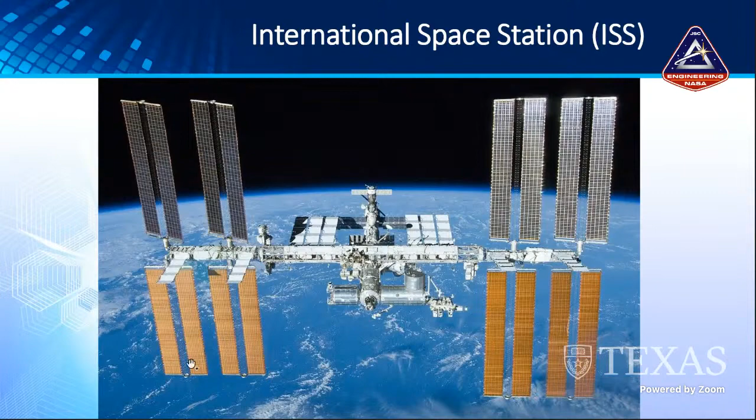Most of you probably haven't even been alive that long, and certainly I don't think any of you would remember a time when there hasn't been someone on orbit. Another way to think of that is during most or all of your lifetimes, not every human being has been on the surface of the Earth. There have been at least 2 in orbit around the Earth, and as many as 9, I think, at different times. So that's a pretty interesting thing to consider, and a lot of people forget about it.

It is the 3rd brightest object in the sky. The only 2 brighter are the moon and the sun. It's about the size of a football field, and it has a pressurized volume, a habitable volume, equivalent to about a 5-bedroom house with 2 bathrooms.

So we use it for life science experiments, physics experiments, and Earth observation. And in the last few years, we've moved more and more towards doing applied research associated with exploration, and I'll touch on some of those things as I go forward. So that's Space Station. Well, we have to supply Space Station, and we have a commercial resupply services program.

We've been flying multiple logistics resupply missions using this program ever since we retired the space shuttle. It's been 3 or 4 of these kinds of missions, plus Russian missions where they generally fly about 4 Soyuz and 4 Progresses a year. And then the other internationals, the European Space Agency and Japanese Space Agency, both fly 1 or 2 every 1 or 2 years.

But our 2 U.S. contractors, one of them is SpaceX. Everybody knows about SpaceX. They've been doing this for a long time and very successfully now. Their Cargo Dragon. One of the very cool things about Cargo Dragon is that it has a return capability. It comes back to Earth and splashes down, and we can bring science back. We can bring broken equipment back and refurbish it and fly it again.

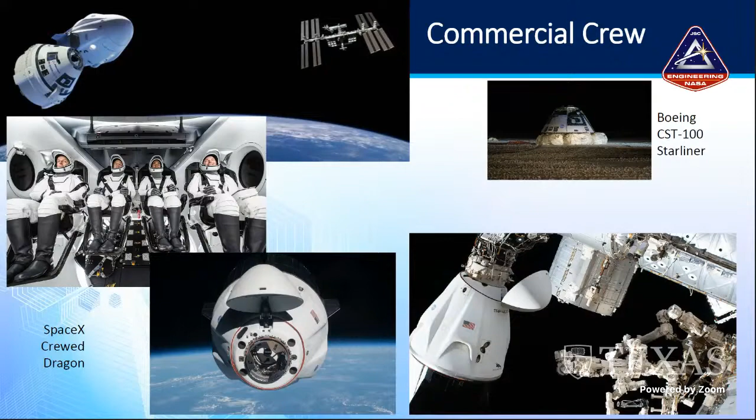So what we're trying to do is to build a sustainable space economy. We want to transition support of low Earth orbit to commercial entities, which we're doing with the commercial crew, and then ISS commercialization and other things, and then leverage those commercial entities to go onto the moon. We'll be in a position where NASA as an agency will take the big financial and technical risks, prove things can be done, and then transition this kind of work to commercial entities.

And all of that's led to the Artemis program, which has the stated goal of landing the first woman and the first person of color on the moon. Originally, this had a 2028 target date. It got accelerated by the Trump administration to 2024. I think that was an aggressive schedule to kind of sharpen our focus. Also had some political motivations.

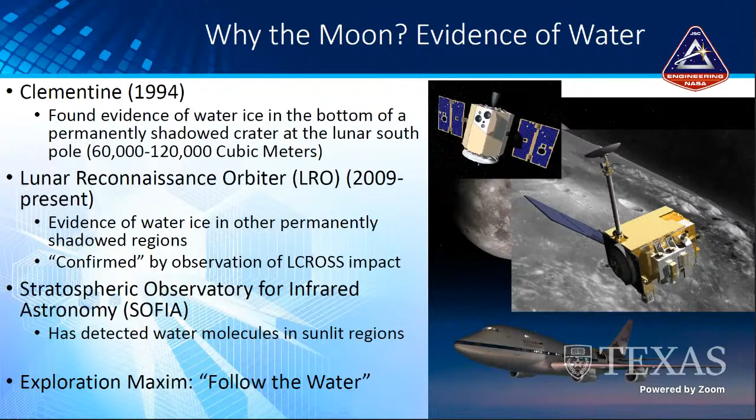So the first thing I want to talk about is the flyby missions. These are Artemis 1 and Artemis 2. But before I really talk about the mission profiles, let me talk about the key elements and systems. To do these missions, you have to have ground systems. You have to have a launch pad. You have to have a building to go assemble the rocket in and that kind of thing. So KSC has been building those up and refurbishing things they had available for Apollo for a while now, and they've done it basically.

You also have to have a communication network. For the early flights, we're going to make do with the Deep Space Network, which is not a very high bandwidth network. We're going to upgrade it some for human use. We can't use the kind of communication networks that you use on Earth because all of the satellites are pointed at Earth. So we'll use the DSN, make our upgrades, and go from there. And actually, a little later, I'll talk about some of the upgrades that we need for more permanent presence on the moon.

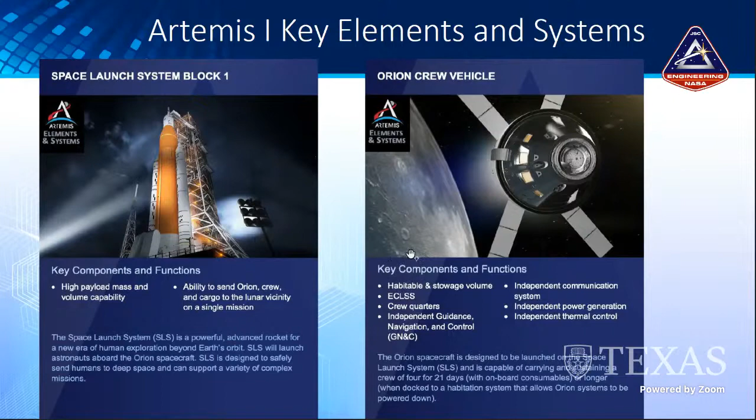And let me talk through this real quick. Starting with Orion, just from a reentry standpoint, we looked at the heat shield, we looked at how the parachutes worked, we tested all of these things out. We've done water impact testing because Orion will splash down in the ocean. Once it does splash down, we've proven that's safe, and then it has to be able to upright itself as well in case it's tipped upside down. You can't let the crew stay like that for very long.

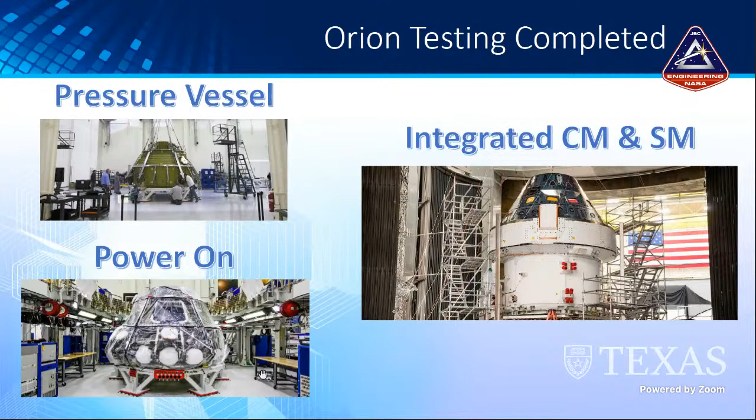You've got the same conical looking capsule and then a more or less cylindrical service module underneath it. So that's kind of the Orion testing, just pure Orion testing completed.

Talking about SLS, we started out early with wind tunnel testing. We've done engine testing. We've tested the solid rocket boosters. It's using SRBs similar to those used on shuttle, but they're a little bigger. They each have an additional segment on them, so they have considerably more power. We've also done structural testing on the core stage. We've done acoustic testing of the vehicle and the engines and acoustic mitigation testing.

We've also recently finished what we call green run testing. I won't go through the whole checklist, but it was the big ticket integrated testing for the entire SLS core stage. And it included firing all 4 engines for the entire length of a mission, so 8 minutes, to make sure the whole system would work for as long as it had to work to get the vehicle into orbit, and it worked. So then, since it worked, we started stacking the vehicle.

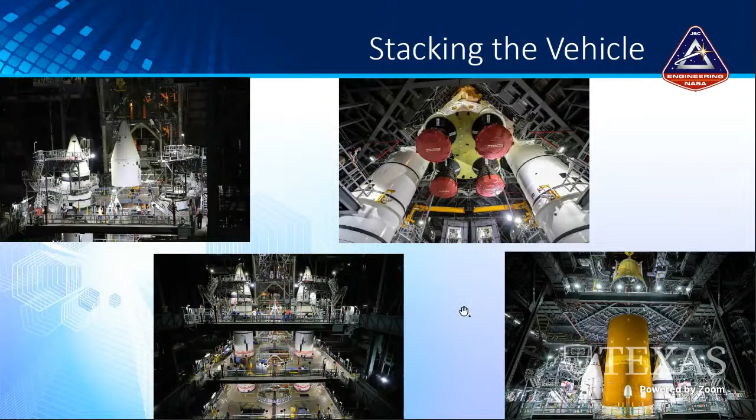And these next pictures are the entire stack. The first one is a view from the bottom up, from the base of the SLS up towards the top. The middle picture is the Orion crew module and service module. It looks different than the picture I showed earlier because it's in its shroud for launch. And it also has the launch abort system on top of it, so that the crew can escape if something goes wrong when the rocket is launched.

And then the right-hand picture is the entire stack in the VAB with all the scaffolding around it. So you have to kind of look to see everything. But it is a truly massive vehicle, and it's going to be a really awesome spectacle when it launches. So let's talk a little bit about that, the mission it's going to go on.

At that point, the upper stage, the ICPS, interim cryogenic propulsion stage, will separate from the Orion crew and service module. The ICPS actually continues on towards the moon and around it once, and then goes off into deep space. And on the way, it will release CubeSats. I think as many as 13 different CubeSats will be released, 5 of them in the lunar environment. And in the meantime, the Orion crew and service module will go into orbit around the moon. I believe it's a distant retrograde orbit.

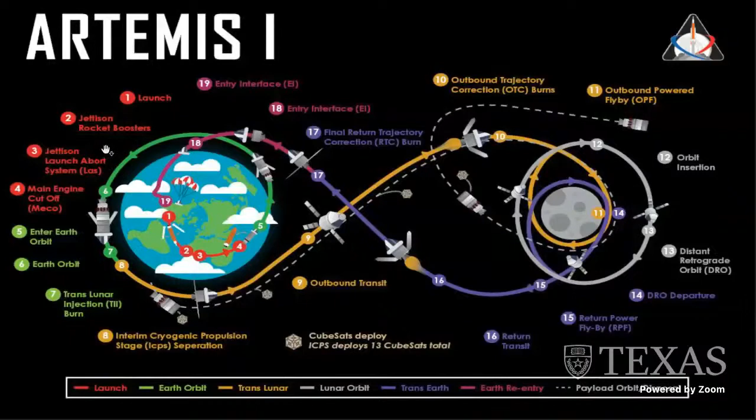It's going to reach about 5,000 degrees Fahrenheit. So it's going to be a pretty challenging thing to get through. And that's what we want to look for, is that success. And once we've proven that, we'll be ready to do Artemis II.

It's a little different a mission. First of all, of course, it has a crew. Its launch date's no earlier than about May of '24. It'll take 4 astronauts into the lunar environment. Now, the big difference on this one is when it fires its translunar injection burn, it's actually going to be done by the Orion main engine, not by the ICPS, which is kind of interesting.

But the main thing about it is it's going to fire that burn, and it's going to be in what's called a lunar free return trajectory. It will come back to Earth no matter what once it fires that burn. It's a big figure 8, and there's no intent to change that other than minor course corrections.

Once we do this, it's going to be the first time humans have left Earth orbit since Apollo 17. So that's what, 52 years roughly. It'll be a 10-day mission, 4 days out, 4 days back. Like I said, it's coming home no matter what. We just got to make sure it comes home safely. So that's kind of the first 2.

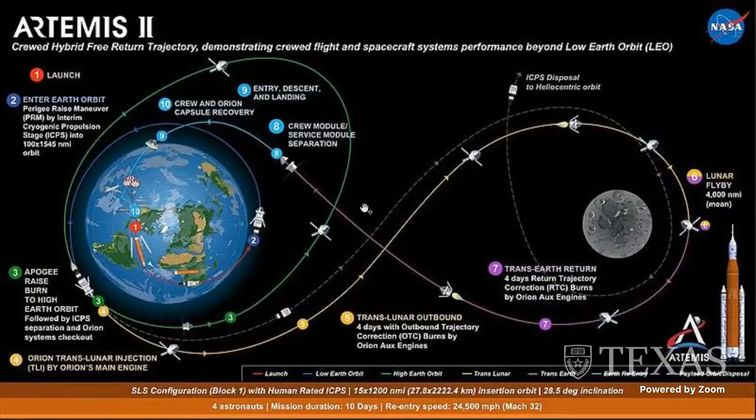And of course, we haven't landed yet here. That's for Artemis III. But in the meantime, we will be landing unmanned vehicles through the commercial lunar payload services. This is a service contract. We are paying companies to provide a landing on the moon and data and services once they get there. We're not asking them to provide the lander itself. That's theirs. We want them to get things landed. We want various scientific payloads landed on the moon.

Very quickly, looking at the key elements and systems, really it's just the landers themselves, and there are a variety of them that I'll talk to in a minute. And then also a key for us is an unmanned rover that we're going to use to search for water ice. It's called the VIPER, Volatiles Investigating Polar Exploration Rover.

The missions, this is a picture of the moon with various past missions shown on it, the USSR unmanned vehicles, US unmanned vehicles, the Surveyor, the Apollo missions, and some Chinese missions as well. And then the CLPS missions are shown kind of in the blue arrows and circles. The first of these, actually, this is probably reverse order.

The first of these is probably Intuitive Machines landing 6 payloads at Oceanus Procellarum. And then the second will be the Astrobotic missions with 11 payloads to Lacus Mortis. It's a little unclear which one's going to be there first. They're within a couple months of each other.

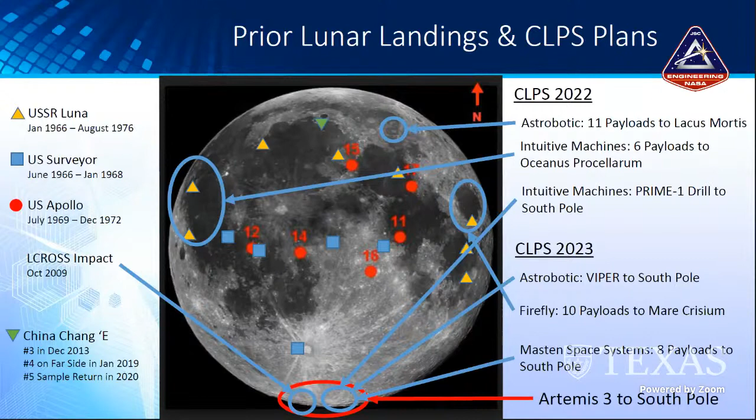Masten Space Systems is going to fly 8 payloads to the South Pole. So that's '22 and '23. There'll be a number of CLPS missions during '24 yet, but they haven't picked them. All of those will be precursors to Artemis III in 2025. So that, I think, is all I had about CLPS.

Very quickly, we'll talk Gateway. This is the space station we're going to put in lunar orbit. Let's go to the next one. These are the key elements: the power and propulsion element, and the habitation and logistics outpost, the HALO. HALO is the actual man part of it. It's the pressurized part where the crew will stay. The PPE is the motive force, if you will. Both of these will be integrated together and launched on a commercial vehicle no earlier than November of '24.

It will actually take them 9 months to get to lunar orbit because the PPE has an ion thruster, which is extremely efficient but not very powerful. So it's extremely good for us once we get into orbit. It just takes a really long time to get to that orbit. But that was the trade we made, and it'll be a good one over the long term. It'll just take a while.

The next component that's important early on is the deep space logistics module. I actually think that SpaceX is going to supply these as well. It's very similar to logistics on space station. They'll bring things up in this module, unload the module, put trash in it, and then dispose of it somehow. I don't know if these will be reflown or not. That's not something I think has been decided quite yet, and it's somewhat impacted by the HLS that you'll see in a few minutes.

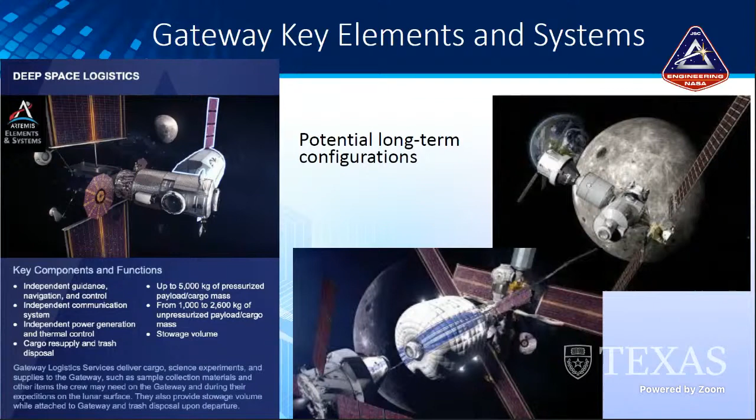And then there's the intent to build up Gateway over time, which I'll touch on in a minute, but I've shown a couple of the longer term configurations. The one in the upper right includes the European Space Agency's ESPRIT module, which just looks like a small module between the original vehicle and the Orion now. And then another one actually has an inflatable module that would give the crew a lot more room to play around in, if you will, and to live in. That's maybe a better configuration for trying out things for a Mars transit vehicle, because we'll want something big and roomy for that.

It's also highly eccentric and spends almost all its time over the southern hemisphere. I think it's a 6.5 day period. Only 3 hours of that 6.5 days are spent over the northern hemisphere of the moon. So you get a lot of good communication on the moon as a whole, but particularly in the South Pole. You can access anywhere on the surface from this orbit.

It makes a decent jumping off point to Mars. It's not the best orbit to go to Mars from, but it's a good one. It's a good orbit to go to Earth from. To go to from Earth. It's a fairly low energy access, which makes commercial resupply more viable. So it just becomes a really great orbit for general purposes. It's not necessarily optimized for any one thing, but it's good for a lot of things. It's also an orbit we've never been in before, and it's got some interesting challenges.

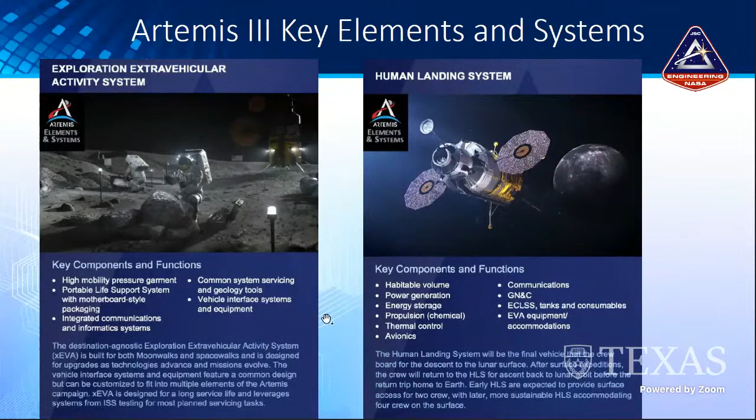We actually did the first phase of this with 3 contractors, blended government teams, each of which had a very different approach. And then we made an award to SpaceX. I think most of y'all are aware of this, using what they're referring to as their SpaceX Starship HLS. They are going to have a line of starships, I believe, for different purposes, but this is the Starship HLS. We awarded this a few months back. There are some legal challenges, and they've only recently cleared, and we've been able to start discussions with them.

So since it's been so recently, there's still a lot of unknowns about the Artemis III missions. I was hesitant to include any sort of mission profiles similar to what I had for Artemis 1 and 2 because I'm sure it's not accurate. For instance, it includes a rendezvous at Gateway that won't happen. And also, frankly, Starship is a radically different design than what we expected, so we're kind of adjusting our thinking in terms of the mission concept. A couple of things I think I can say about it.

First of all, there will almost certainly be an unmanned lunar landing before Artemis III. The Starship will touch down unmanned and they'll test it out and all that. When Artemis III comes along, it will launch unmanned and be refueled and checked out in low Earth orbit. Once we know everything's good, we'll launch a crew on Orion. Orion and the Starship will rendezvous somewhere. Might be in low Earth orbit, more likely to be in a lunar orbit. I'm not sure which one.

They'll transfer the crew, either 2 or 4 of them, from Orion to Starship. They'll take Starship down to the surface, do their thing down there, then ride Starship back up to Orion and use it to return to Earth. The Starship itself, the first one, I'm not sure what they'll do with it. They may bring it back to low Earth orbit and refuel it. They could even bring it back to Earth itself. That's kind of up to SpaceX at this point, and we're not sure enough of what their plans are yet.

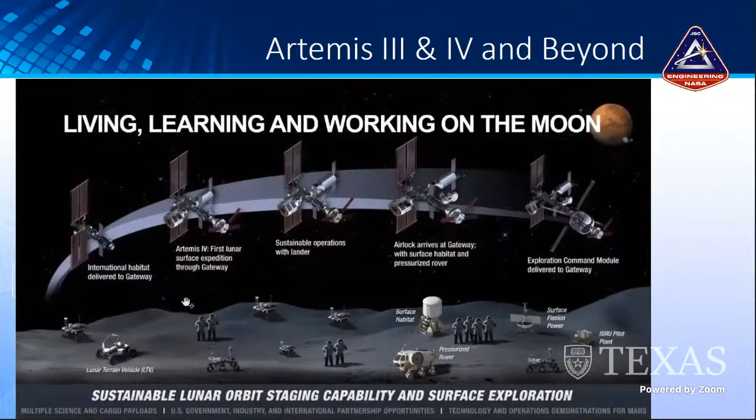Then after Artemis III, we'll start expanding Gateway, expanding the lunar base, et cetera, and go for much longer missions and start to use those to learn how to go on to Mars. And as we do this, we'll get greater engagement from our commercial partners and also our international partners. They will be supplying various components of the base camp and other exploration capabilities.

So this is a little bit of what the base camp might look like. I won't talk through it on this picture, but very quickly, the kinds of components I mentioned already, we've got to upgrade the communication systems in order to give them enough bandwidth for humans to use. What the deep space network is today is somewhat equivalent to a dial-up modem. We need something much more equivalent to high-speed internet. We also need a network on the lunar surface.

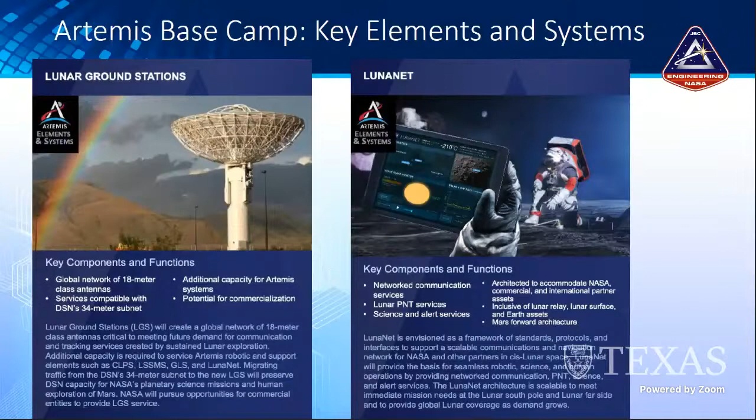We kind of started calling this LunaNet. I'm not sure if that'll stick, but the best way to think of it is something akin to a 4G or 5G cell phone capability.

Just as important as how we generate power is how we transmit it. Running cables from a set of solar panels or a nuclear generator all the way to a habitat takes a lot of mass to bring cables up there, and we don't want to spend that much mass, so we're going to have to find better ways to do it.

We've got other technologies we've got to develop as well, high-performance spaceflight computing for a lot of reasons, but one thing of particular interest is that it enables precision landing. We need to be able to put landers close to the permanent base and let them take off again without having to worry that we might actually hit the base, right? So we've got to have something very reliable there.

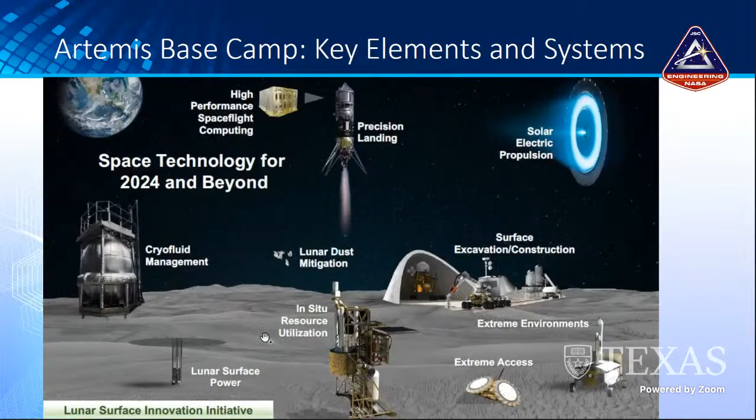We've got to have lunar dust mitigation stuff in place, ISRU. If we're going to refuel the landers from, say, the H2 and O2 from water ice, we'll need some cryofluid management capabilities and various other things on the surface.

Mobility is extremely important because we're talking about a really big area. The crater in the middle here is Shackleton Crater. I've overlaid on top of this an outline of Washington, D.C. in orange, and then the beltway around Washington, D.C. in red, just to give you a feel for how big it is. You're not going to be able to do this on foot. You have to have the ability to transit on a vehicle.

You have to have the ability to stay in that vehicle because you can't just always keep coming back to a single fixed point. And of course, you'll have to bring power along with you and all kinds of things. So we're very much working towards that kind of architecture to enable exploration and ultimately to go beyond Shackleton Crater too.

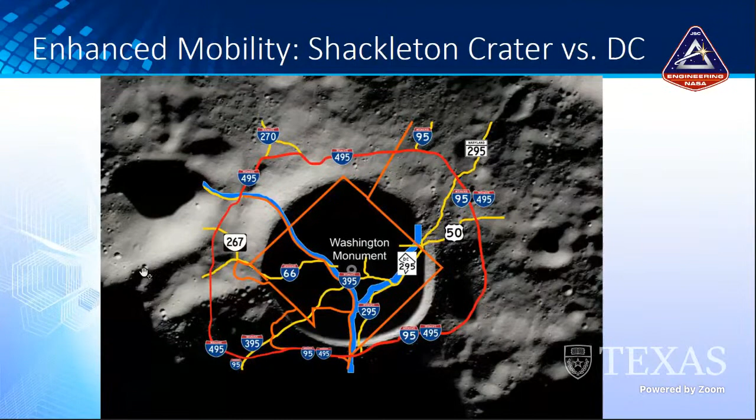For humans, they face isolation and confinement issues, which can create some behavioral problems. It's hard to deal with that kind of thing. Distance from Earth is a problem too, both from a mental perspective, but also from a comm delay perspective. You can't talk to anybody easily once you get past the moon a ways. The moon's only about 3 seconds round trip, a second and a half one way. But once you get to Mars, you're talking 15, 20 minutes one way kind of delays. So you've got to have ways to deal with that.

Gravity is an issue. We actually at this point know more about how humans perform in 0G than we know how they perform in 1/3 or 1/6 G.

So we've got to figure out how to deal with those different G fields. And then changes in gravity are a big deal. It takes a while to get acclimated when you go from 1G to 0G to 1/6 G. Or more importantly, going to Mars and being at 0G for 9 months and then going to 1/3 G. You have to deal with physical weakness, you have balance issues, your reflexes are different, all kinds of things are at issue, and we've got to work on how to deal with that.

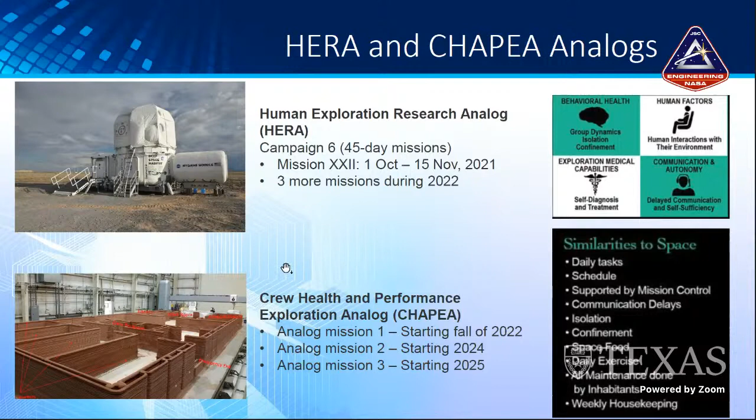In addition, there's going to be lots of interesting stuff happening on ISS. There'll be a number of crew rotation missions and resupply missions. There'll be the private astronaut missions, maybe even Dream Chaser. There'll be EVAs. All of that stuff will be happening in low Earth orbit, and I can't even begin to list all of it. So that's kind of the short term. Longer term, or of great interest here, is the Artemis Accords.

So we're going to lead these Artemis missions. International partnerships are a big deal, a key role in achieving a sustainable and robust presence on the moon. We can't do it all by ourselves as the US, and we particularly can't do that and then go on with a human mission to Mars. So we're trying to negotiate a common set of principles to govern the civilian exploration and use of outer space. That's what the Artemis Accords are all about.

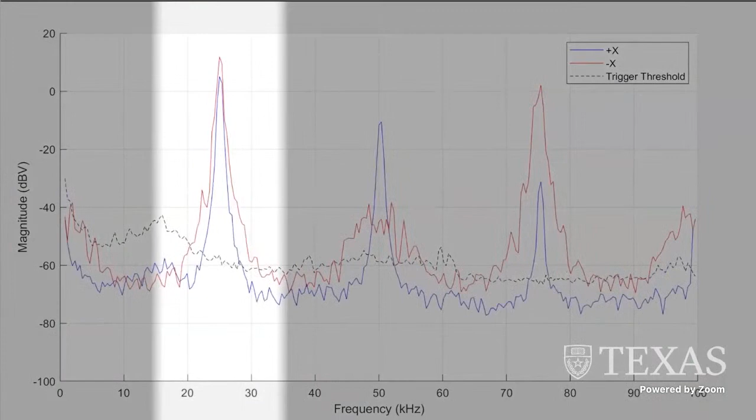This product is important because it can serve as early automated leak detection for pressurized vessels such as spacecraft, airplanes, and industrial equipment. Email now for more information.

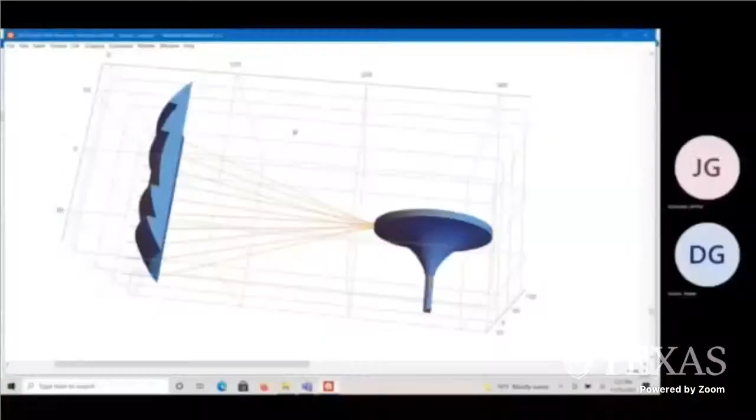Team Hyperion is spearheading the effort to design, simulate, and develop the methods needed to produce a lunar solar concentrator that will give explorers near continuous access to energy on the lunar south pole. This undertaking requires the team to synchronize functions between a variety of tools, including CAD software such as Autodesk Inventor, Optica EM for ray trace simulations, and SimScale, along with MATLAB for thermal analysis. Success here on Earth will power our journey into the unknown.

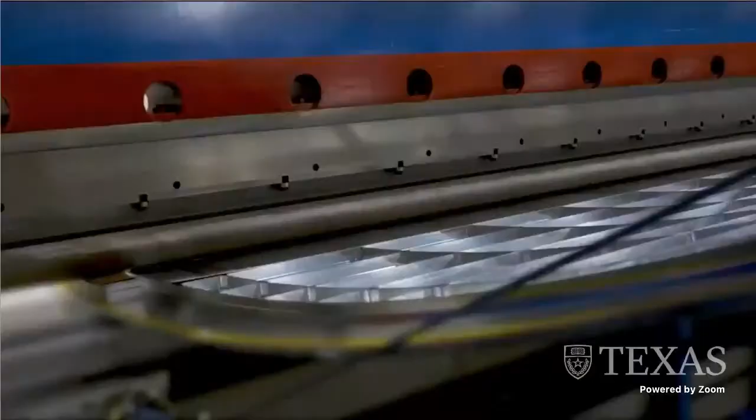Moving on to the next section, we will have a simple Ethernet switch which will connect to our 4 ICs. Then, through a series of common connectors, we will connect to our data collection. These could be anything: a habitat controller, various thrusters, alarms, you name it. This is a brief overview of what Team Vulcan has been working on these past few months.

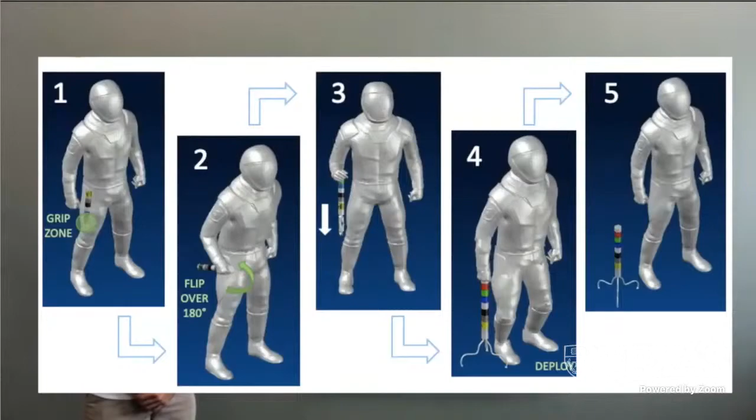Team Callisto intends to provide an improved solution for any mission, whether it be on the moon or any future destination. We are NASA Space Grant.

Hello, my name is Ali Hamoud and I'm the team leader for Team Untitled. We are working on the Advanced Spacecraft Lighting Control System. In space, crew members will not be able to maintain their circadian rhythms, so we are creating a method to help them maintain that. Hi, my name is Alejandro Bacallo and I'm the reporter as well as the hardware lead for this project. My name is Nicholas Tyndall. I am the software lead for this project.

In order to help with the circadian rhythm problem, we are going to be using an artificial lighting system to help align circadian rhythms both in humans and plants with that which we expect. We also hope to add a voice control system as a secondary goal. Our plan is to use a network of Raspberry Pis to control a DMX lighting system, as well as read from sensors to see the actual values being outputted by those systems. Those values will be used with a GUI interface running on a Raspberry Pi as well to control and implement our system. We are NASA Space Grant.

Human exploration has thrived throughout history. NASA is currently the forerunner when it comes to space exploration. Research has led to believe that there is ice water present in the south pole of the moon. The problem at hand is radiation coming from cosmic and solar rays. Our plan is to find a way to design a material that would act as a black body. Our team used the application of surface roughness and geometry to achieve a more black object, to model an ideal black body using the properties of absorption and emission.

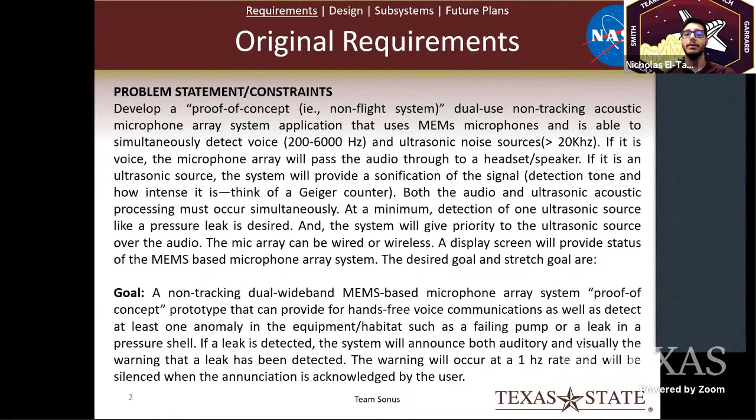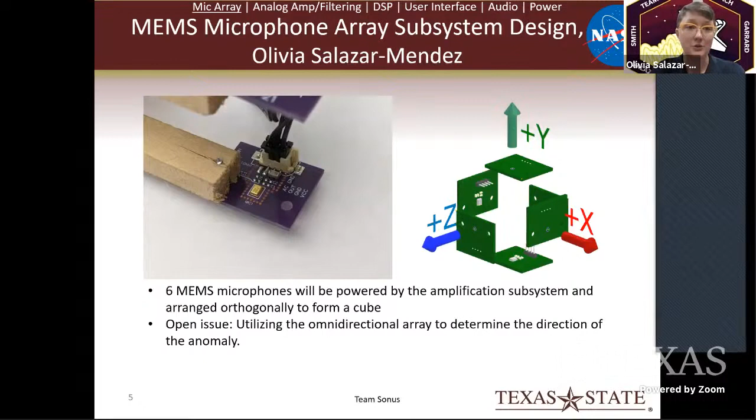I'm in charge of the analog amplification and filtering subsystem. This subsystem takes 5 volts DC from the power subsystem and feeds that through a linear regulator, which outputs 3.3 volts to each of the MEMS microphones, as well as to each stage in the analog chain. The subsystem takes in the signal from the MEMS microphone and passes them through a high-pass filter, an amplifier, and a low-pass filter, which help attenuate noise and condition the signal for processing by the DSP subsystem.

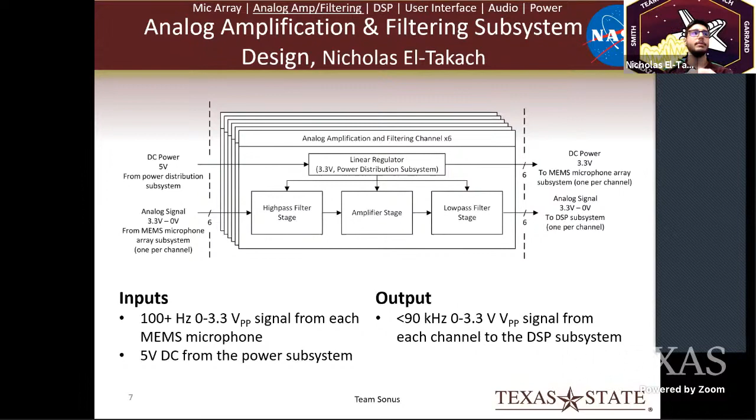I'm Mason Huebner, and I manage the digital signal processing subsystem. Inputs include function calls from user interface for output audio controls and the analog signals from the analog conditioning subsystem. The ADC digitizes these signals, allowing some DSP functions to be performed. These include digital filters and downsampling to isolate voice audio data from one or more channels, and fast Fourier transform to calculate the spectrum data for all channels. This spectrum data is used for noise floor sampling, anomaly detection, localization, and sonification.

Detection is based off the current signal magnitudes and the sampled noise floor. Localization compares magnitudes between microphones to determine a likely point of origin. Alarm synthesis is simply an alert tone, and anomaly sonification allows user to hear the anomaly. The output audio is mixed and sent to the output audio subsystem, while the detection localization data is made available to the user interface.

This is an example of proof of concept showing data from 2 microphones spaced 180 degrees apart. The trigger threshold is determined by sampling the noise floor at startup and applying an offset, while the localization is determined by comparing the magnitudes between the 2 microphones.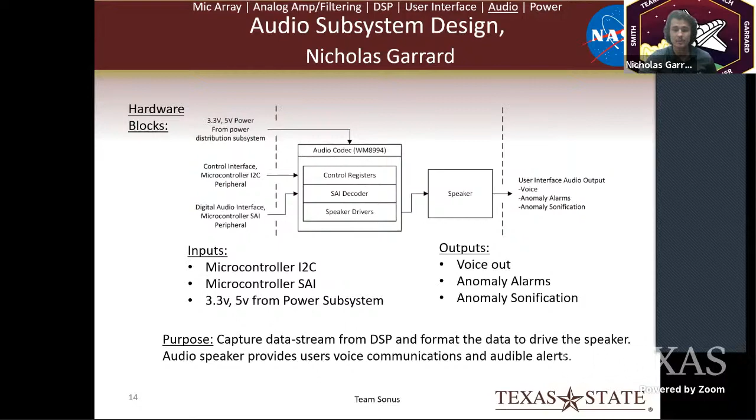Hello again. This is the audio subsystem. This subsystem is comprised of two parts, one being software and the other being hardware. Initially, the software receives a 16-bit 12 kilohertz sample data stream from the DSP subsystem. Via I2C and the serial audio interface, this initializes the audio codec. In hardware, the audio codec decodes the data to drive a local speaker. The local speaker provides voice, anomaly alarms, and the anomaly sonification that was previously mentioned.

These are some of the design risks and design considerations that we've had in mind while designing our system. Now, some of these risks include delays due to the ongoing COVID-19 pandemic, delays due to the ongoing part shortages, any delays due to learning curves for any subsystem implementation, any undiscovered design flaws that we encountered during implementation, which we have allotted time for, and delays due to acts of God.

We could have another Texas Snowpocalypse, which would be terrible, but then my snowman would get a friend.

We also have some design considerations that we'll be thinking of as we continue to build this project. One of them being redundancy wherever possible, so that any small parts failures won't bring down our entire system. We also are considering size, weight, power draw, and heat generation, which is especially important for the use of this product in space and air travel. We also are considering a universal user interface by using simple symbols such as the vector described earlier to make it a little bit easier for people if everybody on the space station is using a different language. And then finally, we have our stretch goal, which is the anomaly localization.

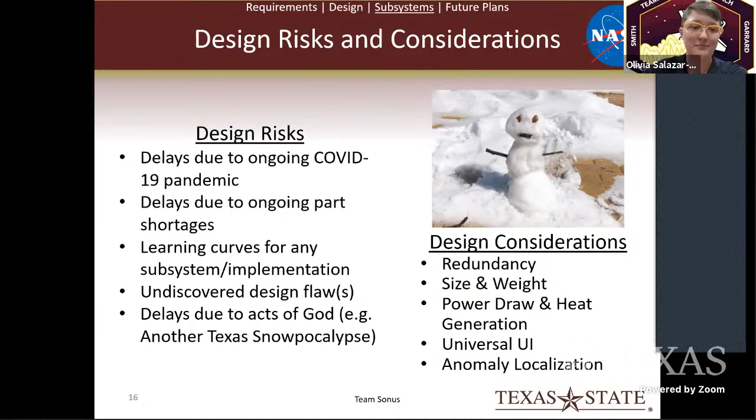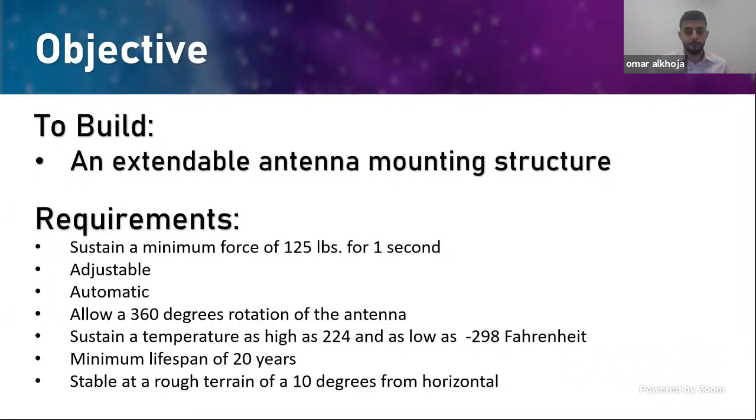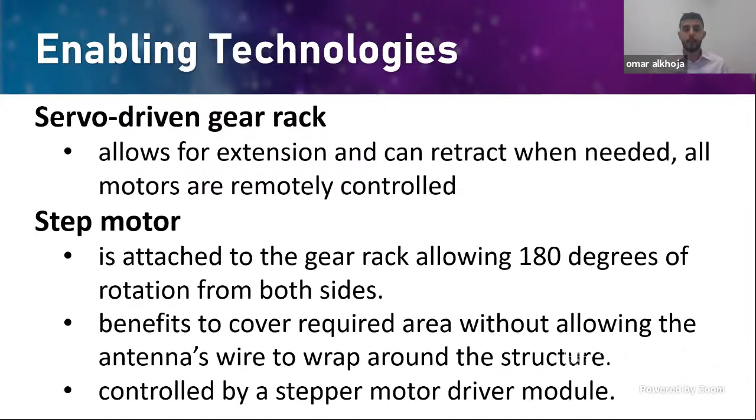In terms of enabling technology, we have a servo-driven gear rack that allows for extension and can retract when needed. All motors are remotely controlled, and there's a step motor attached to the gear rack, allowing 180 degrees of rotation from both sides. This is very beneficial because it would prevent the wire from wrapping around the structure. And the last thing would be the step motor is controlled by a stepper motor driver module. And that will be it for me. Now Ismail will go ahead and introduce the design.

Next slide. So our proposed concept consists of a metal box structure with a gear rack that is driven by a servo motor, as you can see. The gear rack can extend up to 3.5 meters, making the total reach of the antenna panel approximately 7.5 meters including the height of the Nova C lander. A step motor will be attached to the top of the gear rack, which will allow the antenna panel to rotate around its axis to cover all the surrounding area.

The rotation will be done in 3 stages. The first stage is a clockwise rotation of 180 degrees. The second stage is returning to the initial position. And the third and final stage is a counterclockwise rotation of 180 degrees. Then the process will repeat. This is done to ensure that the wire attached to the antenna does not wrap around the structure and break.

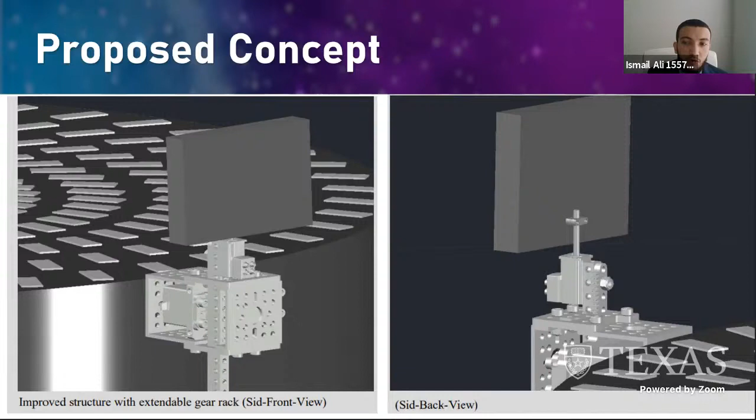The antenna will be fixed to a rotating cylinder coming from the step motor with a cylindrical bracket holder that can be adjusted to fit the size of the rotating cylinder. Also, different types of bracket mounts are considered. Our simulation, next slide. Our simulation was done on the gear rack to ensure no large deformation or fracture occurs. The gear rack was fixed from its teeth as well as the back sides.

The finite element analysis as well as the thermal analysis simulation were performed including two constraints: radiational heat of about 106 degrees Celsius applied to the whole body, which is the average temperature reached during the daytime on the moon. Also, 125 pounds of weight applied on the top side of the structure, and 3.75 pounds of weight applied to the front top side, which represent the force applied by the space crew needing to grasp or kick off the antenna structure, and the weight force applied due to gravity by the antenna panel, respectively.

The weight force was applied assuming Earth's gravity, which is about 6 times larger than the moon's gravity. However, this assumption shows that our device can actually carry more than the simulated weight on the moon. The maximum deformation recorded was less than 2 millimeters, which shows that the structure will not break or develop plastic deformation for the specific type of aluminum alloy that is used as a material.

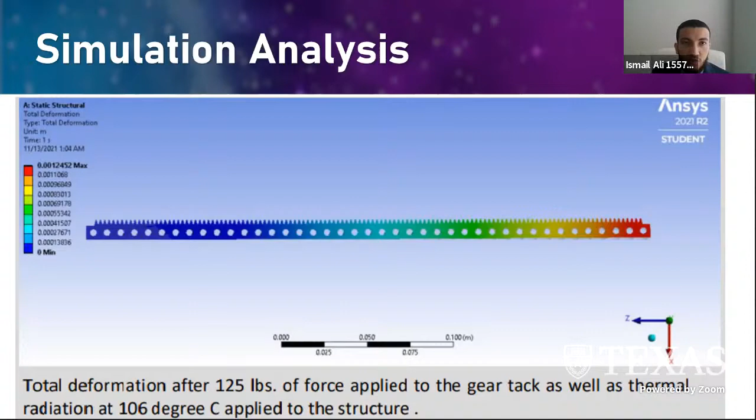As we develop the design further, we will perform more simulation to meet the changes in the device. Once our team develops a prototype, we can run more tests to validate our device. And now Yusuf will be speaking about the material selection.

Thank you. My name is Yusuf, and I'd like to first point to the antenna that we're going to be using for our device. So the antenna required for our mounting structure is a high gain type, which means it can amplify weak signals used in satellite communication. And the panels with the antenna are going to be about 476 millimeters long and have a minimum weight of 1,750 grams. And it'll allow an antenna signal of 15 dBi.

So the frequency of this antenna is expected to be about 1800 megahertz. Higher frequencies result in wider bandwidth, and that results in higher data rates. And this will be important for facilitating the BTS, the base transceiver station, which is going to be used for LTE wireless communication. So on the left side, we're going to talk about the material selection.

So in terms of material selection, we were concerned about the device becoming brittle under the moon's colder temperatures, which can be as low as negative 173 degrees Celsius. And for the mounting device, we found aluminum alloy T6 grade to be a suitable primary material. It's a material that's commonly used in heavy duty structures such as aircraft wings, helicopter rotors, and shipbuilding structures.

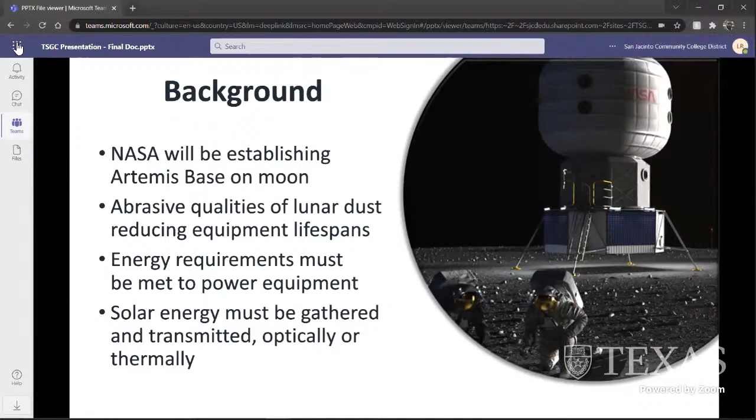All right, good afternoon, everyone. We are Team Hyperion, comprised of Daniel Guerra, Luis Ana Padron, Jeff Gleesman, Luis Rosario, and myself, Jordan Seibert. Today, we will be presenting the novel non-tracking fiber optic solar concentrator for extraterrestrial applications.

NASA will be establishing the Artemis base at the south pole of the moon, and assessing the obstacles encountered during the Apollo missions, it is crucial to consider the abrasive qualities of lunar dust that can drastically reduce equipment lifespans, design a durable source of power collection that is capable of meeting the needs for longer explorations, and opt for materials that will optimize solar energy collection through optical and thermal means.

This year, two teams are working in collaboration on this project. Team Hyperion, comprised of San Jacinto and UT Tyler students, will be working on designing the lens, and will also be in charge of optical simulations and thermal simulations. The second team, Team Solace, also from UT Tyler, will be focused on lens and collector fabrication, designing a testing bench, and testing for thermal concentration. Both teams working together on this prototype will then produce data that can be used to validate San Jacinto's optical and thermal simulations. Next slide, please.

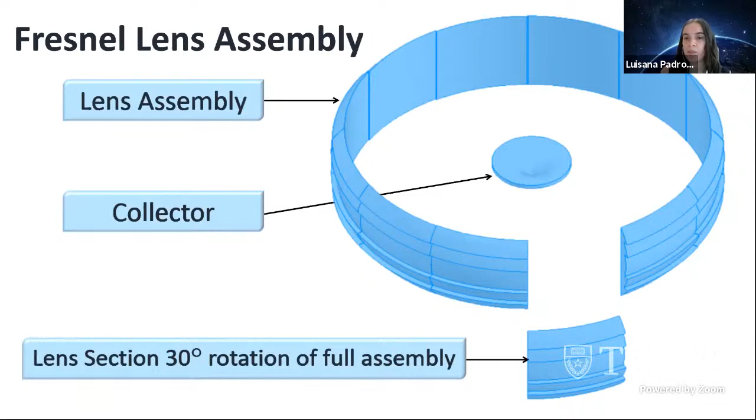Jeff, you're muted, sir. Jeffrey.

Next slide. Daniel, you're muted.

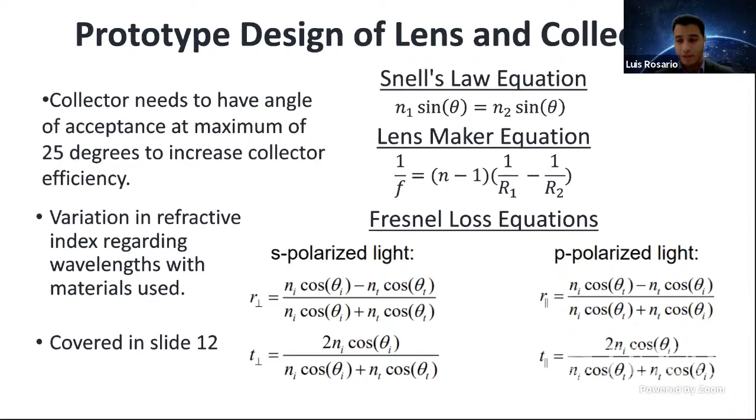To mitigate the damaging effects of lunar dust, it was decided to apply silicon dioxide to a polycarbonate and PMMA lens. With the addition of a coating, it was important to consider the changes to the overall refractive index of the combined materials. Altering the refractive index means the focal point will shift closer to the lens. However, this shift will not be significant due to how thin the coating is expected to be.

After designing the lens, the design team transferred the STL file to San Jacinto's thermal and optical simulation branch to be simulated on Optica EM software with the appropriate refractive index that was assigned for the material. On the south pole of the moon, solar rays are near parallel to the surface. With that in mind, the team selected simulation parameters consisting of a 10 parallel ray configuration, similar to the expected angle of solar irradiance.

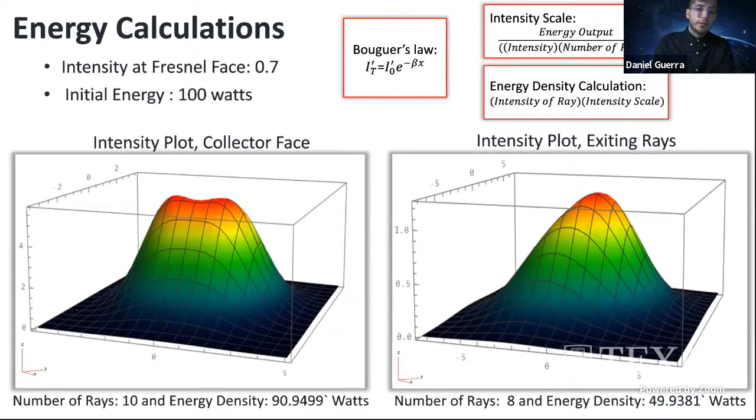In addition to a steady state heat transfer analysis, thermal simulations were created in both SimScale and MATLAB to investigate the heat transfer of the system and attempt to predict the behaviors of each material selected. In SimScale, the heat transfer simulation solves for the temperature distribution and heat flux in solids under thermal loads. In implementing equations such as Fourier's law and Newton's law of cooling, the coefficients of each material can be found and input into the required slots in the system.

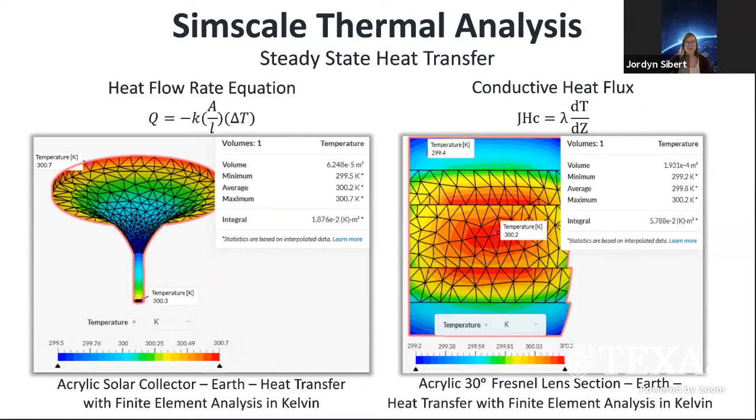After all accurate and desired coefficients, SimScale will calculate the heat transfer outputs as demonstrated on the slide, which presents us a deeper analysis that allows for inspection point tools and a summary of your minimum, maximum, and average temperatures. Parallel simulations were also run in MATLAB to ensure the outputs in SimScale were consistent.

In deciding which system is providing the most accurate outputs, comparison with data collected from the materials branch, Team Solus, needs to be done and has been added to our forward work next semester.

For power generation, the team will implement the use of a black box that isolates the system from ambient light. Within the capsule, there are multiple solar panels that are wired in series to produce up to 32.5 volts at 2 milliamps. To transport the collected optical energy, a side glow fiber optic cable was coiled and placed in the capsule. The use of the side glow fiber optic cable allows for the collected light to shine evenly along the surface of the cable, allowing for the embedded solar panels to use that light and turn it into usable energy.

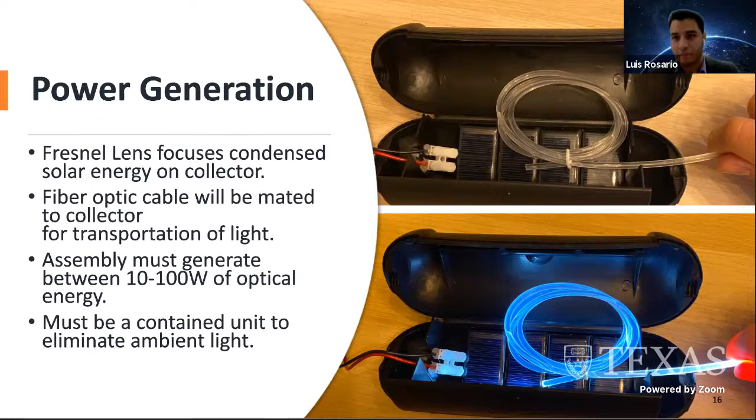In fabricating multiple testable prototypes, it is expected to validate the simulations run on Optica EM for this Fresnel lens-based novel tracking system. Once the simulations have been validated, projects can be upscaled for future lunar missions. It is imperative to consider having a modular and compact design that allows for the improvement or replacement of parts while maintaining its integrity in the hostile environment of the moon. Additionally, with the abrasive qualities of lunar dust, a system had to be designed that would eliminate the need for moving parts. Next slide, please.

And this is for our future work. We will be fabricating the lenses and a test bench. Team Solus will be using that test bench for optical and thermal concentration. We will also finish developing the power capsule to generate between 10 watts to 100 watts as usable energy. We'll also be doing finite element analysis for the lens transportation, and we'll also be testing the lens for efficiency and power generation.

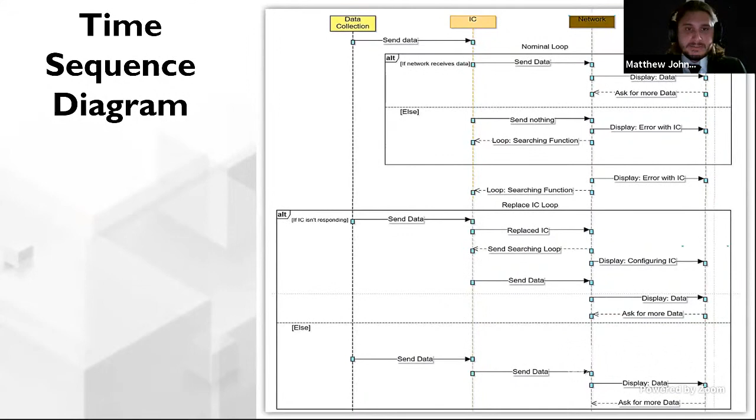What's not represented here, but will be implemented in the future, are status indication lights. That way we can at a glance determine whether or not our controllers are imaged properly and if they are on the network or not.

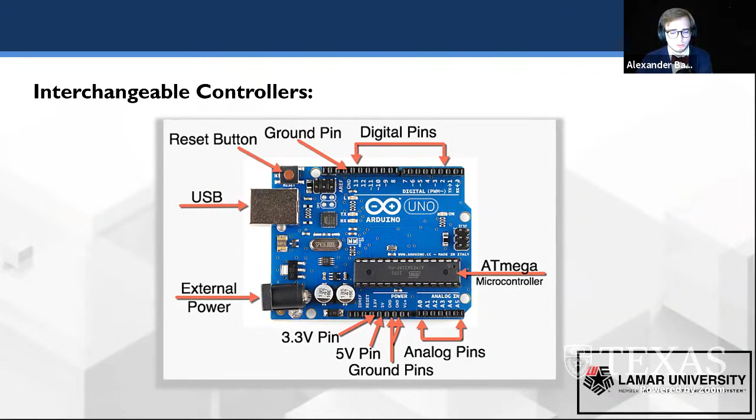Arduino Unos are inexpensive, open source in software and hardware, don't require any external programmer, and the IDE software that comes with it can operate on any operating system, which includes Windows, Linux, and Mac OS. The Arduino Uno features several pins, such as voltage outputs, ground pins, analog pins, and digital pins. There's also a physical reset button to restart the controller in cases where a quick fix is needed. Arduino Unos have both USB and external power ports as power sources. The USB connection allows the user to upload code to the board from a computer, but also run and loop independently, which is vital for our setup.

As previously stated, Arduino IDE is open source software, giving us an abundance of libraries and the ability to ping a server. The language that's being used is called Processing, which is very similar to C code. Having experience in C++, we had some areas in which we had to learn. We tested some controller receiver code that we wrote with a temperature sensor on a breadboard and received positive feedback, which leads to my last point.

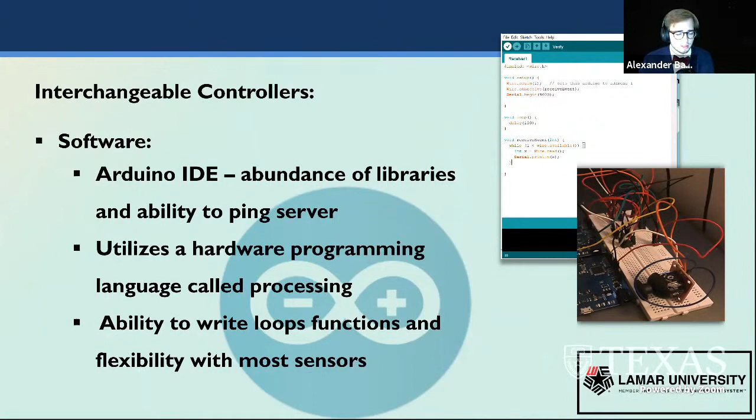IDE has the benefit of having the flexibility with most sensors. Now, this next section is going to be wiring schemes presented by Bradley Gray.

Hello, my name is Bradley Gray, and I'm going to be talking about what is going into our decision-making process with the wiring scheme between the IC and data collection. Our first look at wiring starts with the OSI model, mainly the physical and data link layers. The wiring scheme will require both digital and analog signals per the constraints of the project.

And when choosing a wiring scheme, we first consider distance, how far away the data collection can be from the IC; usability, how easy the wiring will be to learn and implement; wire amount, 2-wire, 4-wire, or dependent on the amount of sensors; and interchangeability, how easy it would be to create modularity with different sensors and simulators.

Moving on to section 7, the future of the project, presented by Jordan Lake. Moving into our next semester, we'll begin integrating the systems we've designed this semester using our functional block diagram and begin the simulation of these sensors and testing of the system to ensure it meets all of the requirements stated by our prompt. Construction of the physical hardware and enclosure will follow this, proving that these simulations operate correctly.

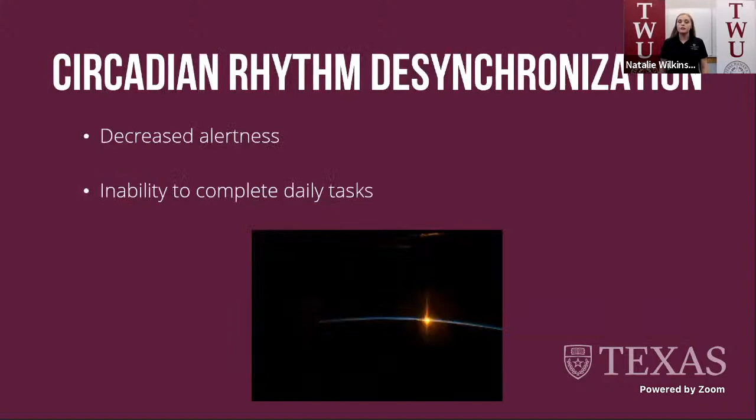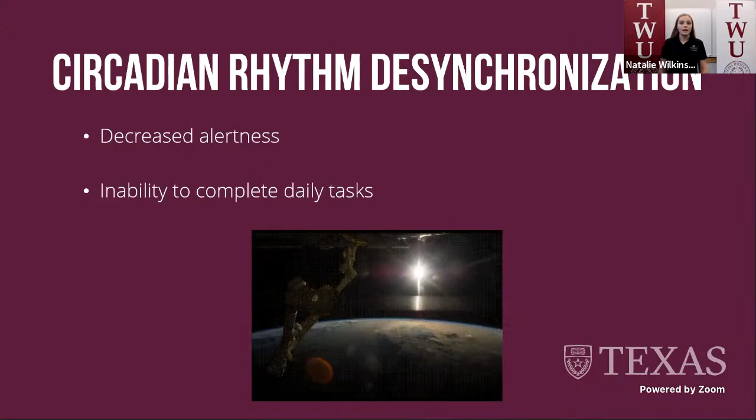The circadian rhythm is an internal process of the brain that regulates the sleep-wake cycle. Outside environmental factors can affect the circadian rhythm, such as lightness and darkness. In microgravity, astronauts witness the sun rise and set about 16 times per day. As a result, a disruption or desynchronization of the circadian rhythm may occur, with some astronauts reporting to be less alert and unable to sufficiently complete tasks, which is especially problematic during extended spaceflight.

There are several strategies that NASA is currently using to mitigate the negative effects of circadian rhythm desynchronization. Sleep medications, many of which are hypnotic drugs, prove to be the most popular option. Hypnotics typically improve sleep quality and duration, but decrease mood. Other side effects include headaches, dizziness, drowsiness, and visual problems. Another countermeasure is caffeine use, and the adverse side effects of this central nervous system stimulant are well known.

Sleeping bags are also used by NASA to combat lack of sleep, but most sleeping bags are reported to be uncomfortable. NASA also utilizes the solid-state lighting assembly. Installed in 2016, the assembly aims to improve circadian rhythms in astronauts. Solid-state LEDs with adjustable colors and intensities replace fluorescent light bulbs in the interior lighting system of the ISS. This assembly currently uses 3 settings.

One of these settings is a higher intensity blue-enriched light to elicit feelings of alertness and shift circadian rhythms. However, astronauts cannot experience personalized light therapy since the lighting system is shared, and circadian rhythm desynchronization remains prevalent. Also, the assembly is expensive and challenging to maintain.

While astronauts may not have a personalized light therapy protocol on the ISS, individualized light therapy treatments have been successful on Earth. For example, bright light exposure is a practical way to reduce jet lag. Light therapy has also been implemented with individuals who suffer from seasonal affective disorder, which results from an extended amount of time in extreme environments with limited sunlight.

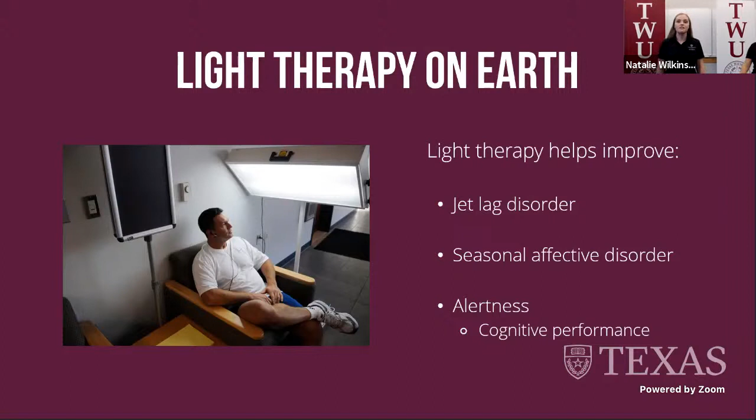The problem that we faced was circadian rhythm desynchronization in microgravity, resulting in decreased alertness and cognitive performance in astronauts. Our solution is glasses emitting blue wavelengths of light via LEDs strategically located on the frames peripheral to the eyes. Next, Andrea will discuss the components of our prototype.

This slide demonstrates a graphic SolidWorks rendition of the components we used in order to build our light therapy glasses prototype. These include 8 blue LEDs, with 4 shown here, a USB LiPoly charger board, inductive charging composed of copper wiring and a charging board, an on and off switch, lenses with holographic tape and a black foam piece attached, a lithium-ion polymer battery, and an Arduino Nano board.

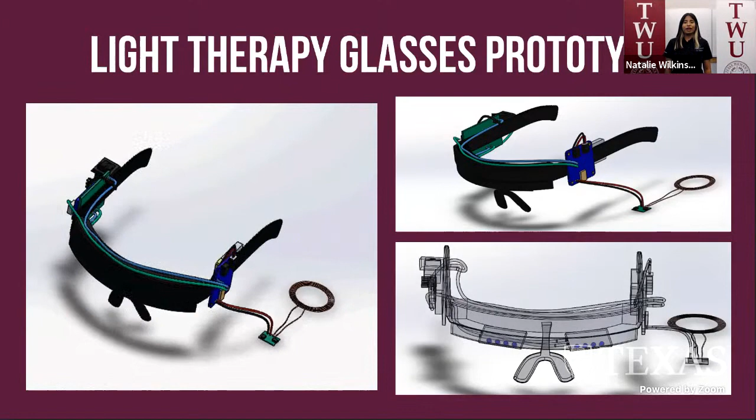Here we can see how the components mentioned were assembled for our prototype. We would like to highlight a few components now. The 8 blue LEDs can be found attached to a board superior to the eyes. The on and off switch is on the outside right of the lens frame, right behind the Arduino Nano board, found on the same side. And finally, the lithium-ion polymer battery is located on the inner left of the lens frame. Now back to you, Casey.

The goal throughout the design of our device was ease of use, portability, personalization, and effectiveness. The light intensity of the LEDs used is approximately 1,000 lux with a wavelength of 468 nanometers, which corresponds to a blue color within the light spectrum. These values were specifically chosen for the optimal combination of light and color for alertness.

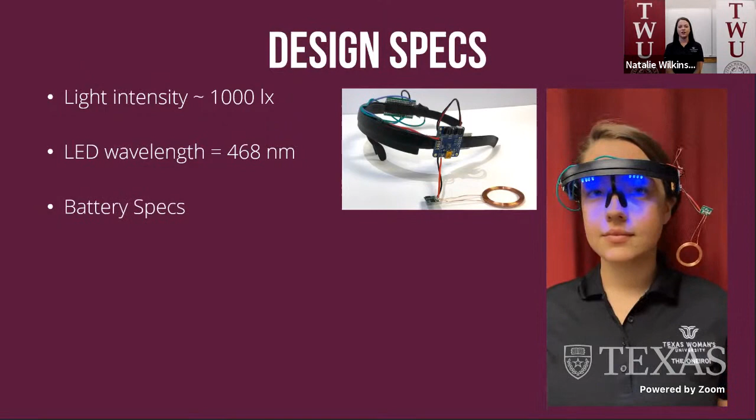The capacity of the lithium-ion polymer battery is 350 milliamp hours or 1.3 watt hours. When fully charged, the battery can sustain a total of 8 light therapy sessions, with each lasting 30 minutes. Our wireless charging component was chosen for convenience and draws approximately 500 milliamps. The total amperage draw of our prototype is 0.35 amps.

We developed our code to not only turn the light therapy glasses on and off, but to have an automatic shutoff upon completion of light therapy. Once turned on, the light therapy glasses will run for 30 minutes. We chose the Arduino Nano and the C++ code because it is most user-friendly and easiest to use for the beginnings of the prototype and code development.

Before our testing protocol began, our participants had to emulate the sleep schedule of an astronaut. This included the strict adherence to 6.5 hours of sleep every night, the week before and during testing. In order to reduce outside influence on our testing results, our participants avoided caffeine, naps, and sleep-inducing medications during this time.

Baseline measures were taken before light therapy, immediately after a 30-minute session of light therapy, and 1 hour after light therapy. These measures included electroencephalography, or EEG readings, and results from the psychomotor vigilance test, or PVT. An EEG is used to measure the electrical activity of the brain through the depiction of various waves. There are 5 brainwave types: alpha, beta, delta, gamma, and theta.

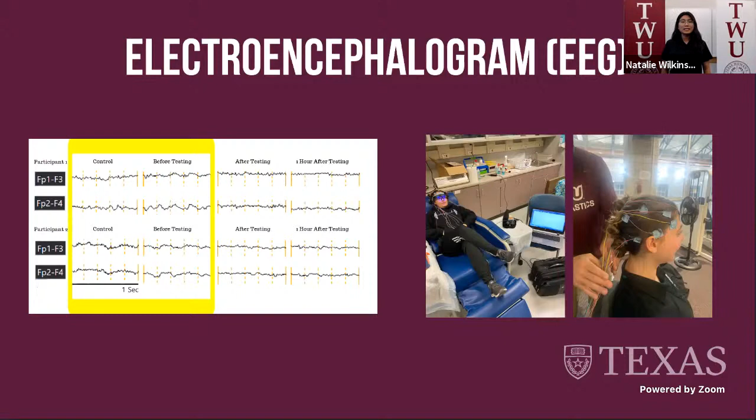As you can see on the slide, we selected 1-second epochs from the raw data. Our analysis concluded that wave morphology did in fact change after light therapy was administered to a more jagged shape with low amplitude and high frequency as seen in beta waves. The control waveform and the waveform measured before light therapy exhibited greater intermixed frequencies of lower value.

The other measure that was assessed was the PVT, which is used to measure participant alertness and cognitive performance through a reaction time test following a displayed visual signal. A low overall reaction time is indicative of greater levels of participant alertness. When light therapy treatment was administered on test days, both participants exhibited faster reaction time responses when compared to the control day when no light therapy was performed.

BL is baseline, which was before light therapy was administered. T1 is the test immediately after light therapy, and T2 is 1 hour after light therapy. This supports our theory that following light therapy treatment, a participant will experience faster response times and greater levels of alertness both immediately after therapy is administered and 1 hour later. Now, here's Natalie to conclude our presentation.

In conclusion, circadian rhythm desynchronization can cause reduced levels of alertness and poor task performance in astronauts. Based on our research, one of the best methods to retrain the circadian rhythm was through light therapy intervention. This option is preferred amongst other strategies currently used because it is safe, non-invasive, and most convenient.

Our light therapy glasses are advantageous in particular because it is cost-effective, offers individualized protocols, and is small and portable. It requires a minimal amount of power to operate and has wireless charging capabilities that offer convenience to the astronaut. There are future considerations that can be noted involving our project design that may further enhance its effectiveness and usability.

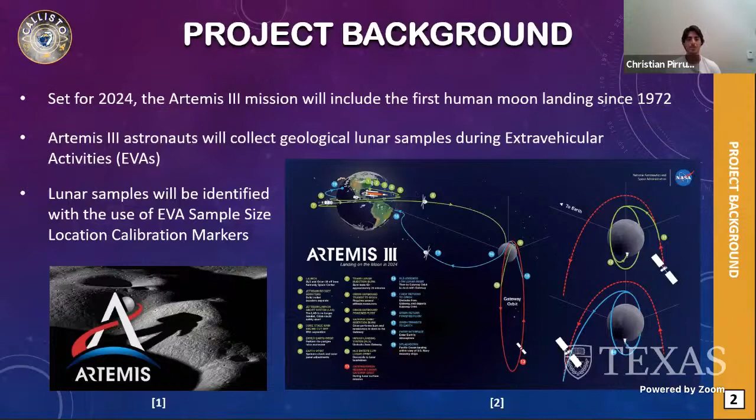So the identification procedure consists of a sample marker being deployed on the lunar surface next to a lunar specimen, after which a photograph will be taken of the marker next to the specimen. The photograph is then transmitted to Earth-based scientists who will use the photometric reference in order to identify the physical and potentially chemical properties of the specimen and determine whether it should be brought back to Earth for further analysis.

So our proposed design will attempt to alleviate some of the design faults associated with the previous era sample marker, such as the potential safety concerns, the strenuous deployment, and the high demand for dexterity it previously had.

So photometric references are an integral and very important component in the identification process of these specimens, since the different colors provide an overall abundant and a very important amount of information about the lunar geology. And with that being said, I will now pass it off to Kiril, who will introduce the design specifications of our project.

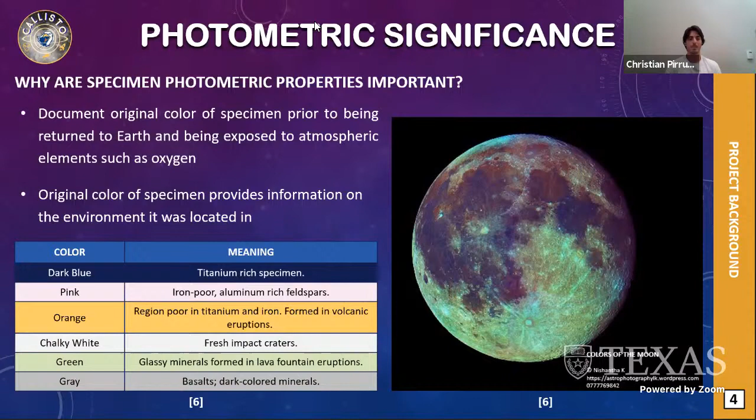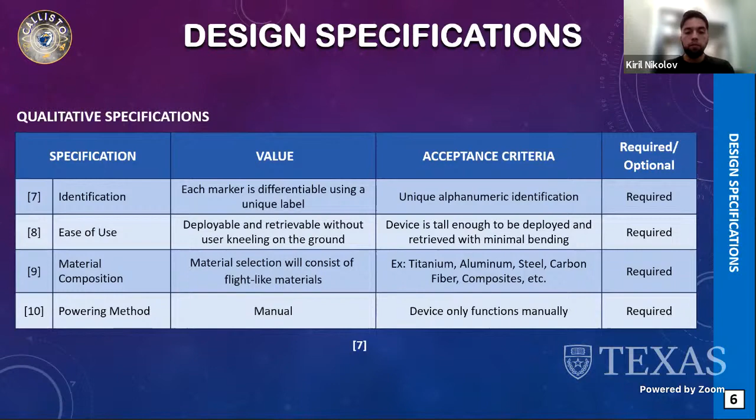Our qualitative specifications include having unique alphanumeric identification labels for each marker to tell them apart from one another, having the marker be deployable and retrievable with only minimal bending and interaction being required, having a flight-like material composition for the marker so that it can properly withstand the lunar environment, and having a manual deploying mechanism for the marker which does not contain any electric components.

The safety specifications required our greatest consideration, and they include having a minimized number of pinch points present on the marker, and if these pinch points cannot be completely eliminated, they will be visibly marked with warning labels. In addition to there being no sharp edges whatsoever at any point on the device, as well as no holes or openings large enough to entrap fingers.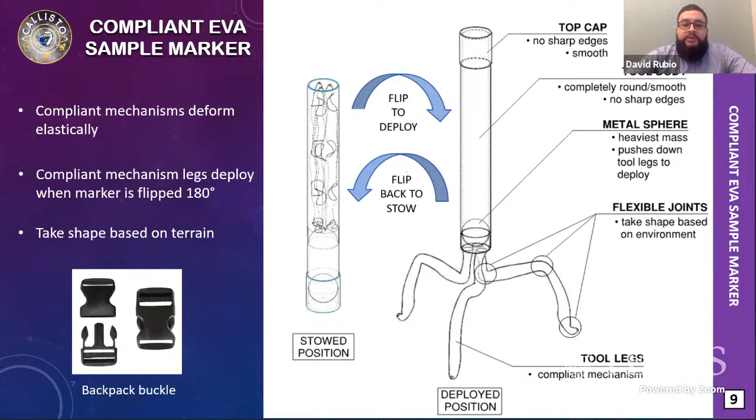and the legs will be deployed out of the marker by simply flipping it over, which will cause a heavy ball to push the legs out to help with gravitational force. Since the legs are flexible, that would allow them to elastically deform and take shape on flat and uneven terrains while maintaining stability. The marker will also have a photometric color chart wrapped around the main body for a full 360-degree field of visibility, and will be manually deployed by the flipping motion.

And the compactness of the design will allow it to fit within a 2 by 4 by 15-inch volume, and the overall height of the marker when it's deployed, which will be about 20 inches tall, will allow it to be placed on the ground with only a small amount of bending being required, typically about 2 to 3 inches of bending at the waist or the knees.

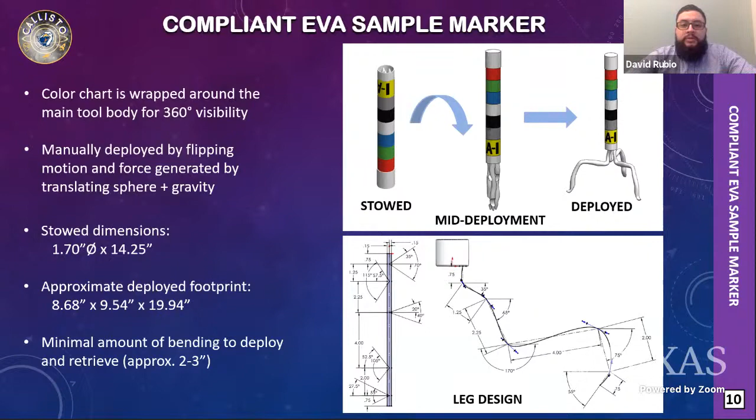The total weight of the marker will also be around 0.84 pounds, using flight-like materials and the size of the main body, which will be able to fit comfortably in an EVA glove. The maximum grip force necessary to hold the marker with standard EVA gloves is only 0.6 pounds, which will allow it to be easily operated by any user. The unique alphanumeric identification label will also be displayed below the photometric chart.

A lot of analysis was performed on the marker using AutoCAD and SolidWorks to determine what the stability of the design would look like. And based on our simulated results and taking into account the flexibility of the legs, we expect the marker to be able to remain stable on inclined surfaces of up to about 35 degrees. Simulations performed on the stress and strain occurring on the flexible joints of the legs when deployed on the surface allow us to determine that these stresses and deformations would not cause the legs to buckle or fail. Now I will pass it on to Anthony, who will go into more detail about our testing procedure and safety features.

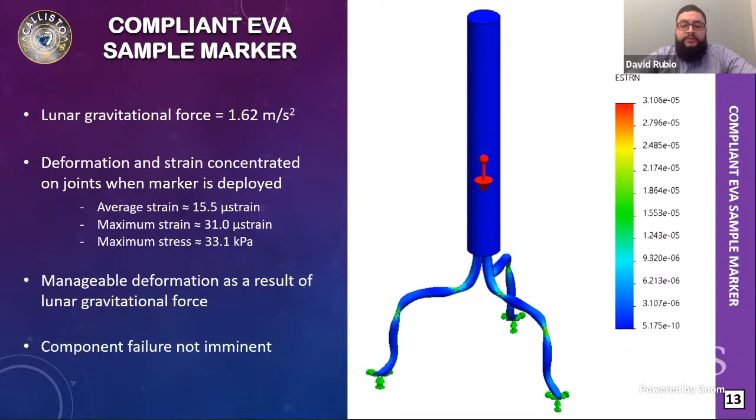As mentioned by Kirill, a lot of consideration was given to the safe operation of the marker. We were able to design our marker so that there are no sharp edges located anywhere on it and no pinch points, as well as no way for the astronaut's fingers to become entrapped while operating the device.

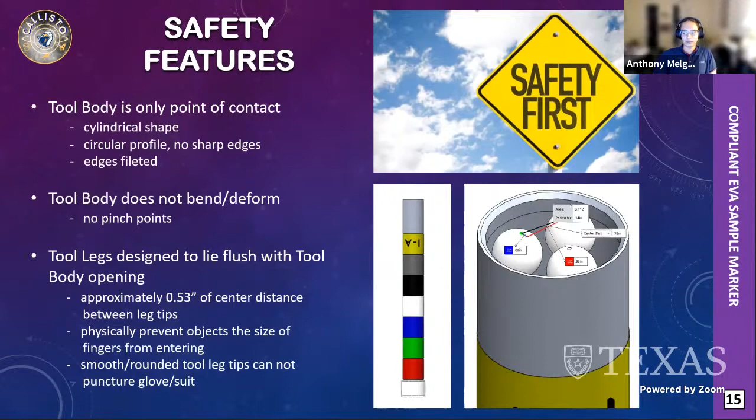Moderate risk factors are associated with the stability and weight specifications since our results are based on simulated data and mathematical models, which may vary slightly in regards to how the design will physically function. However, the simulated results still show that we will have a large margin of safety to work with, even if they are not 100% accurate.

Our future direction for the project is to begin the manufacturing process, which we have scheduled to start on November 29th. We will be utilizing two sets of materials. One will be specific for 3D print prototyping at the Neutral Buoyancy Lab located at Johnson Space Center, and the other is for flight-like considerations during actual moon landing missions.

Since using flight-like materials can become very expensive, initially prototyping the marker with more accessible materials and components will allow us to simplify the process, and we will be able to generate more results in less amount of time before finally building our final flight-like marker. And now Mercedes will finish off her presentation by going over our budget and conclusion.

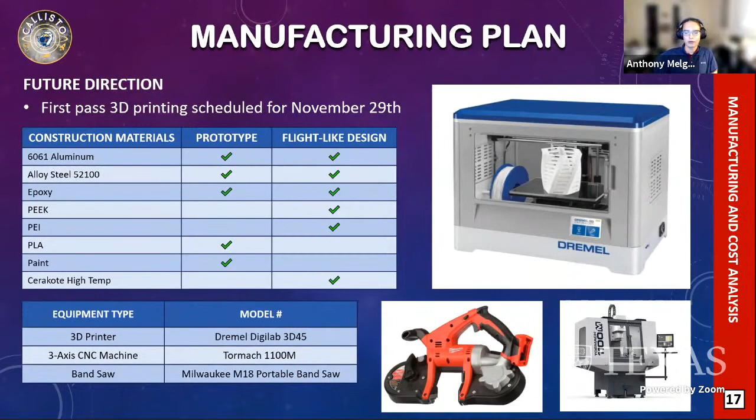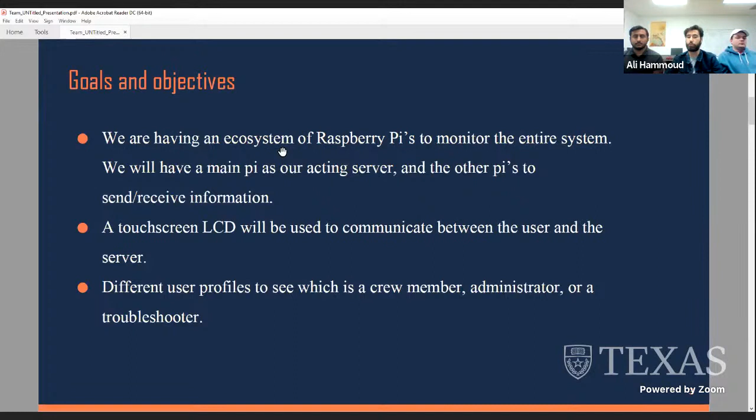So we have designed the system to have their own individual parts. One big benefit for this is that if one part is malfunctioning, the rest of the system will still be operational. So that way you can replace the part and make it a simple fix. So it adds a sort of layer of redundancy just in case in the event of an accident. Also, having a main server send out the information to the rest of the other microcontrollers makes it streamlined and frees up resources for other sorts of data.

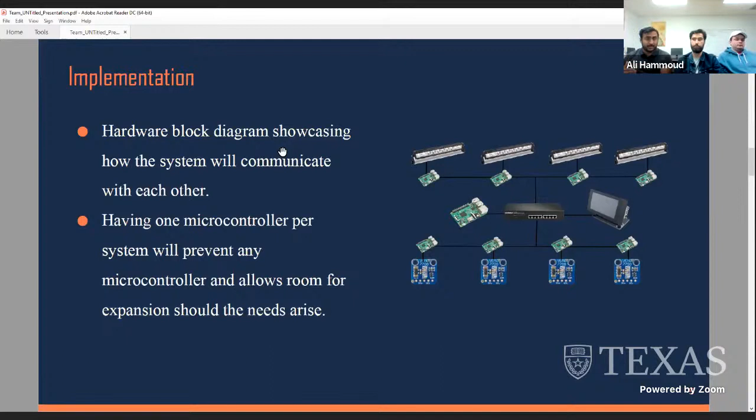So the hardware block diagram shown right here will show how our system is going to take place. And we will have one microcontroller per system, which allows room for expansion if the need arises. So as for the lighting system, each Raspberry Pi will have both a lux and RGB sensor connected to one Pi, and the information will be sent to the server. And then the profiles will be loaded. We'll select which color for the profile and output the light to the light bar. The sensors will also monitor for degradation and compensate if the lux drops.

As for the central control, it will go as follows. It's going to be basically our main control system, and we're going to be using Android Studio to design the central control system that can be run on any Android platform, that being a tablet, a phone, or our home-built Android Raspberry Pi. The app will be connected to the servers using Retrofit and exchange data as needed.

The main screen will show the control options, which are listed as follows. We're going to have lights, rooms, profiles, sensors, plants, and troubleshoot. We're going to have the ability to add or remove any of those components as needed. So if we need to add a new light or add a new room, assign different profiles to it, or even assign a plant profile, which monitors how the plant is going to grow and provides the necessary lights. And at the end, a troubleshoot is going to run all the possible commands and test the connections to see if everything is working as needed.

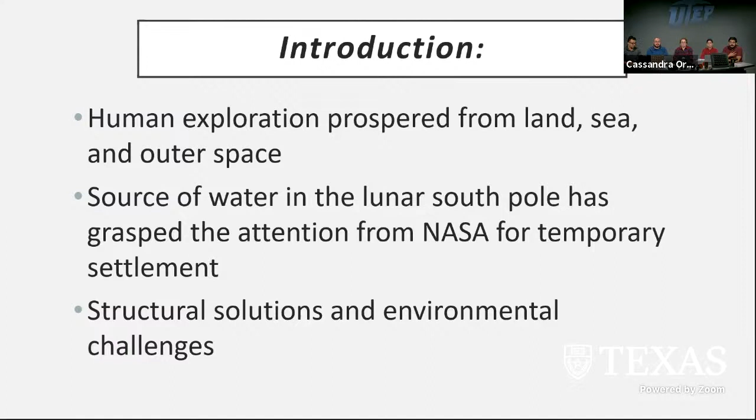So in relation to manufacturing processes, architectural and material selection applications, our theme, Black is Black, is related to an ideal black body. Basically, energy that goes into our material in the form of light is completely absorbed and transformed into heat, thermal energy, based on the law of conservation of energy.

Mathematically it can be described as a radiation transfer equation of wavelengths. For example, absorption is the light that is absorbed by the material, then we have scattering within and from the material, and then the emission, which is the transformation to heat.

One of the most common paints used for black body applications is Vantablack. However, this type of paint becomes brittle under most temperatures. On our end, one of the objectives that we have is to find a new method of paint that would resist these temperature changes. Another thing that we need to assess is the absorption of the radiation with different tools.

We have our thermal imaging, our infrared gun, and our illuminance meter as well. And we need to investigate the absorption effects on different materials. We used aluminum, PLA, and also egg carton, and we processed each one differently with different surface roughness as well as geometry to see how the radiation would be absorbed and reflected.

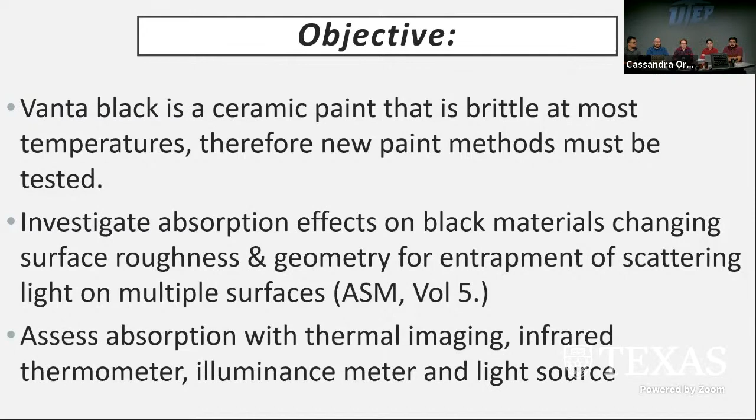And for our material design process, when we started coming up with ideas for this, one thing we noticed is that different plastics and different things all have a different surface roughness, and that surface roughness basically had a major impact on how it absorbs light, mainly because light scattering across the surface can help to redistribute light across the entirety of the body so that it's easily absorbed by the black material.

We picked aluminum as our casting object because it has high roughness that helps with the paint adhesion and light scattering. It's also low cost compared to other metals. High thermal conductivity to distribute heat produced from the lighting system. It's lightweight, easy to machine, and it's an experienced metal that we use here at UTEP.

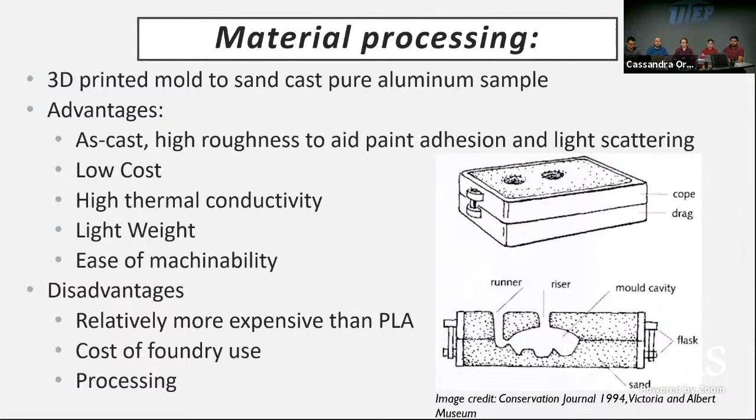Now, why casting. We use casting because it has high roughness average compared to other material processes. And material roughness is important because there are surface defects where paint can adhere better to the metal and increase light scattering, making the object even darker. Now we're going to show you a clip of the metal casting process.

It's not playing on the... It's not sharing. On our end, it's playing, but not in the presentation. So basically, you want to describe what's going on?

Alrighty. The guy on the bottom is wearing a heat resistant suit. He's pulling a crucible full of molten aluminum. And the two guys in front of him are going to transport that molten aluminum to the sand cast.

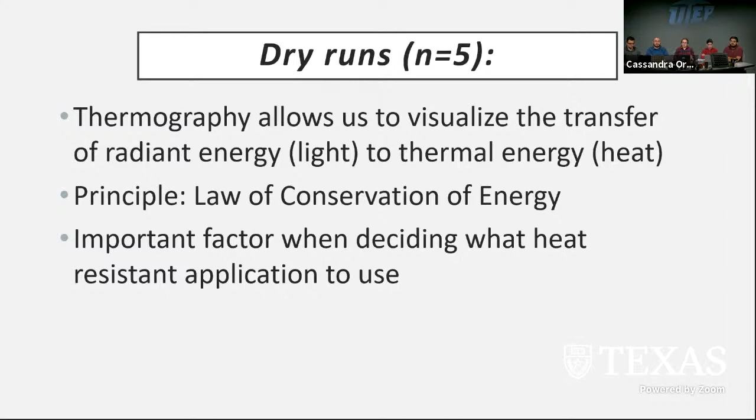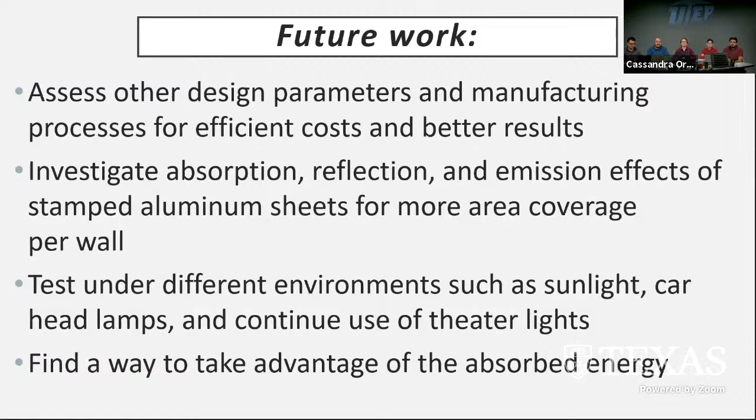So we do wish to advance in our design. One way we were thinking of doing it is a stamped aluminum sheet. It's a little more cost-effective production-wise, and it's able to be put up a little more easily. We will be improving on efficiency and costs, and hopefully yield better results in future outcomes.